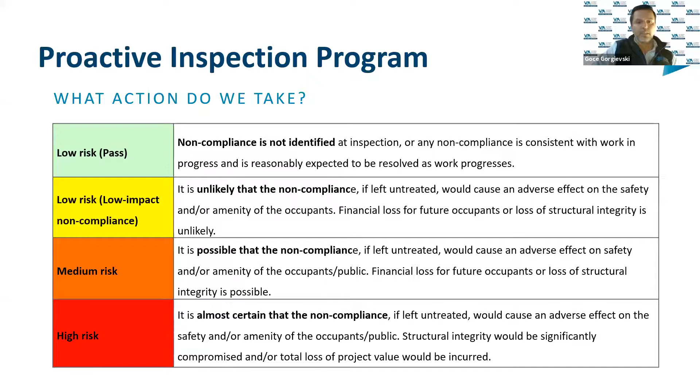Recent findings: a tad over 4,000 inspections were conducted in Q4, comprising 2,252 building and 1,796 plumbing inspections. They were conducted across 50 municipalities in Victoria, covering 722 builders and 174 building surveyors across the state.

28% of the overall inspections showed compliance risks. A total of 1,139 notifications have been sent out.

The most common non-compliance issues found on site were to do with timber framing, unreinforced brickwork and accessories, footing, slab constructions and subfloor, and damp and weatherproofing.

Framing was considered the highest, so for the purpose of this presentation we're going to focus on the timber framing defects. Other defect findings will be presented most likely at a later stage.

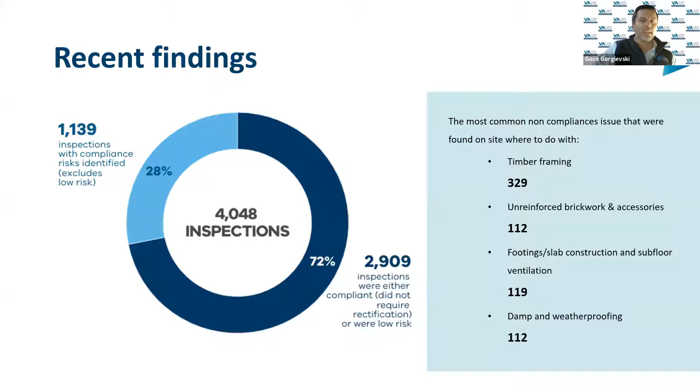So in today's session, we'll be highlighting the most common issues the inspectors identify on site that relate to timber framing. It will provide examples and explanations of defective building work we identify and how they have been rectified.

In most cases, when the team attends building sites, the mandatory frame inspections have been approved and the roof is already loaded. The majority of these items in the following slides have been identified after receiving confirmation from the relevant building surveyor that the frame inspections have already been conducted and approved.

It is possible that if it was left untreated, or were not detected throughout the proactive inspection program, it would have caused an adverse effect on the health and safety of the occupants and future financial loss to the owners.

Our aim today is to highlight various issues the team identifies on a weekly basis. Various before and after shots have been provided showing compliant and non-compliant construction.

We'll kick off with an easy one, but a very common one: bottom plates overhanging the concrete slab. The photographs highlighted in red show the bottom plate overhanging the slab. This is not compliant. Under the Australian standards, there are no prescribed allowances for that timber bottom plate to overhang. It is defective building work.

The guides to standards and tolerances, currently under review, allow a 90mm stud to overhang only a maximum of 10mm, but this is just a guide. Areas that exceed the allowable tolerance require a review from the relevant registered civil engineer to provide evidence that compliance with the NCC 2019 Volume 2, Part 2.1 is satisfied.

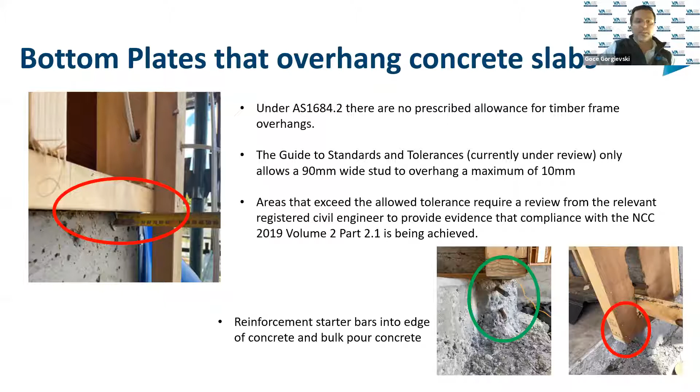Attached are some more examples regarding bottom plate overhang on the slab. The top left photo shows the bottom plate installed correctly. On the same job, a section of the bottom plate, when measured, was overhanging the slab by 30 mil. As there are no prescribed allowances for the timber bottom plate to overhang, this is non-compliant building work.

A common rectification detail on site normally involves a steel angle dyna bolted to the slab. As you can see in the photo below, highlighted in green, this builder has installed a treated pine H4 timber dyna bolted to the slab at 450 centres. This rectification was designed by a registered civil engineer that complied with Part 2.1 of Volume 2.

Also, when the bottom plates overhang the slab, please ensure the minimum cavity widths are not compromised when the brickwork commences.

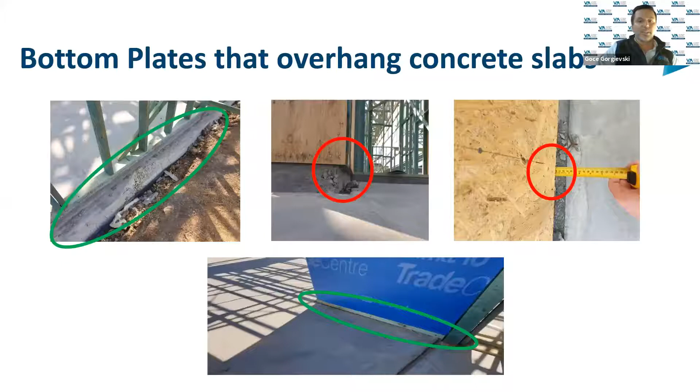These photographs show excessive notching and cutting to bottom plates and studs. This is deemed defective. The Australian Standards allow for a maximum hole of 25 mil on the face of the bottom plate. The structural integrity of the framework has been compromised in the photographs. Part 6.2.1.4 of the Australian Standards must be followed.

To add, where notching exceeds this in a braced wall, consideration must be given to Part 8.3.6, noting that sheet bracing walls require a continuous bottom plate. Studs were also not evenly spaced as required by the Australian Standards to suit loads, lining and cladding fixings. When they are cut and do not run the full height, this is no longer achieved and is deemed defective.

Braced walls: the first photo shows an existing timber braced wall, highlighted in red, that has been cut so a post can be installed. This is deemed non-compliant. The buildings are designed to resist imposing forces. Alterations and additions should factor in existing braced walls to ensure that they are not compromised as part of the new work. They should be reinstated, or another suitable wall nominated and braced.

In the second picture, highlighted green, the rectification was to install new steel bracing where the existing timber brace was cut. Compliance was restored.

In the third picture, the metal bracing does not span the full length of the wall. This is defective. Metal bracing is required to span from the top plate down to the bottom plate. Where the bracing is cut, as identified in the photo, to allow for plumbing work, the wall is no longer working towards providing the initial assumed bracing capacity. Once the plumbing work has been completed, the bracing should be reinstated as originally designed and constructed.

The team inspects a lot of braced walls. Bracing is normally not installed on a 30 to 60 degree angle, and as you can see in the last photo, the braced wall was measured at less than 1.8 in width. For compliance to be achieved, the braced wall width should be between 1.8 minimum and 2.7 maximum. These minimum and maximum requirements are straight out of the Australian Standards.

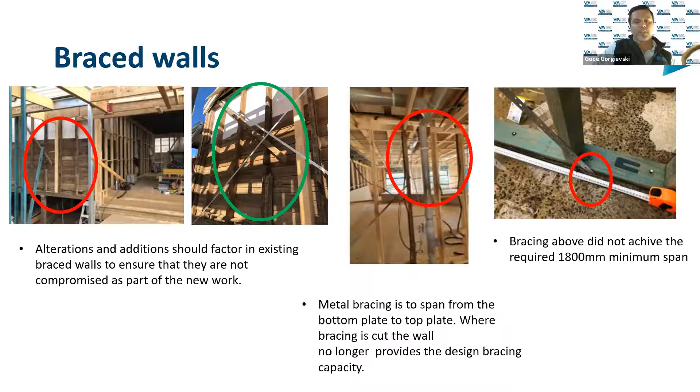In this next slide, it's more of a design oversight. When considering the location of braced walls, it is important to factor in the proposed service fittings that are going to be installed within that wall. Consideration was not taken into account for the services to be installed. The bracing has to be cut to complete the mechanical services and will compromise the initial bracing capacity.

The bracing has already been cut when the toilet fittings were being installed. This is defective building work. The wall is no longer working towards providing the initial assumed bracing capacity. The bracing should be reinstated. If it cannot be reinstated, another wall may be required to be braced, or alternative brace sheeting provided to achieve compliance. This obviously must be discussed with the relevant building surveyor or engineer.

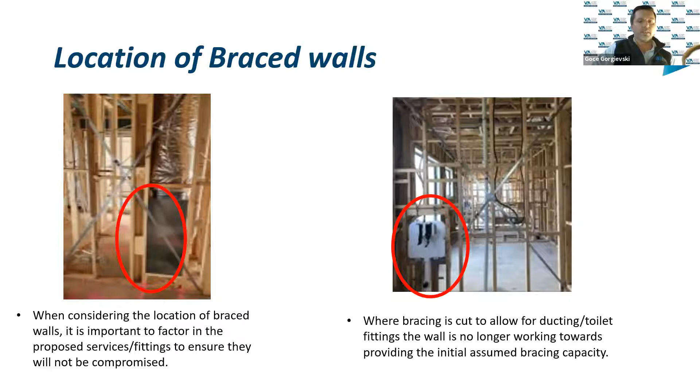Excessive notching of braced walls is pretty common. Ensure that the manufacturer's installation guides are being followed so that the wall can still provide the required bracing capacity. Depending on the sheet bracing being used, most commonly areas within 300 mil of the corners should be avoided. Small diameter service pipe penetrations of approximately 30 mil should only be drilled a maximum of 4 per sheet, and large service pipe penetrations of a maximum of 150 mil are limited to 1 per sheet.

Also, unless otherwise specified, the sheet bracing must span a minimum of 900 mil wide. In the top right photo, to achieve compliance, the bracing had to be replaced due to the excessive cuts. Australian Standard 1684 requires that the sheeting be continuous from the top plate to the bottom plate, with any horizontal sheet joints made over noggings with the same fixings as the top and bottom plate. Part 8.3.6 of the Australian Standards outlines the required installation for different bracing units.

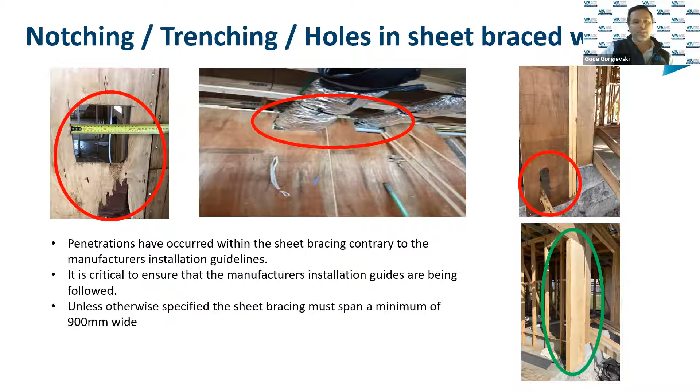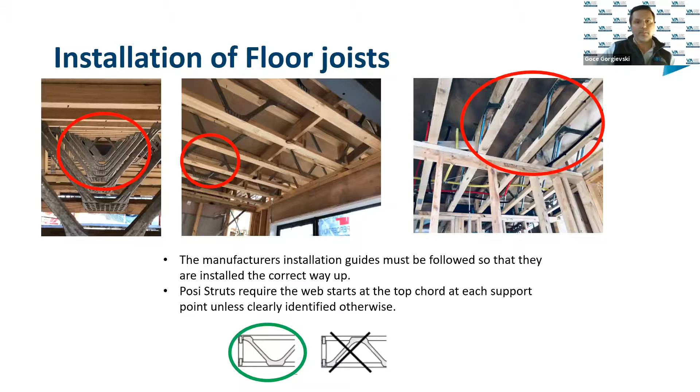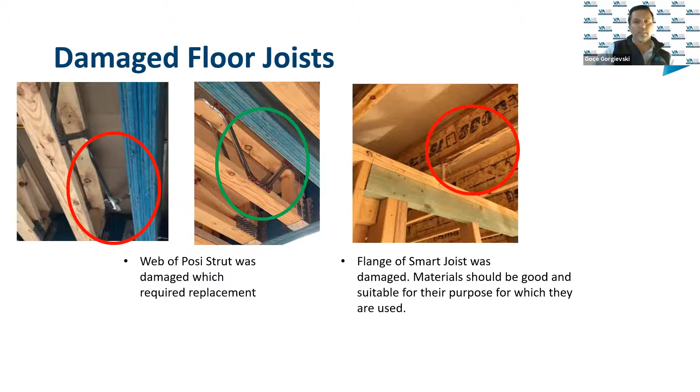As you will see in the next two slides, the plumbers have had a field day. These items are identified on a daily basis by the team. By highlighting these issues, we hope to make various trades, supervisors and builders aware that this practice and advice is defective and not acceptable. The structural integrity of the product has been affected.

We encourage inspectors, supervisors and builders to keep a lookout for this item, and if noticed, raise it and work with the engineer and the relevant building surveyor to rectify it. If left undetected, it could lead to serious structural collapse. It's critical that supervisors and builders are aware of this practice occurring, as 8 out of 10 times the frame inspection has already been approved prior to any services being installed.

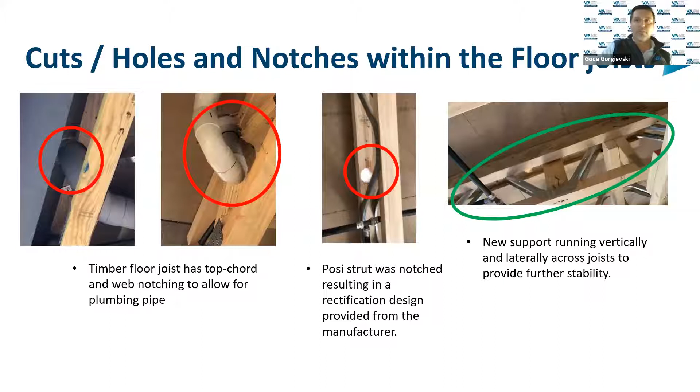With so many different products in the market, it may be confusing to keep up with the requirements. When using E-joists, the cuts must be neat and not within 5 mil of the flanges, as per the manufacturer's installation guidelines. The spacing of the holes is also important depending on the width and diameter of the holes. Please ensure that the correct manufacturer's installation manuals are followed for the product used on site.

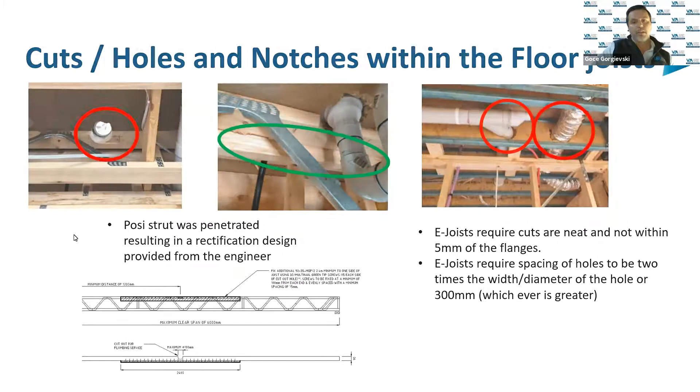The most common defect the team identifies on site relates to floor joists and the lack of end blocking and bracing. Not providing blocking or bracing is a defect. The blocking or bracing at the ends of the floor joists is critical as it provides lateral support to resist racking effects imposed on the structure. Depending on the product and method of bracing used, it can be between 1.2 to 2.4 metres max.

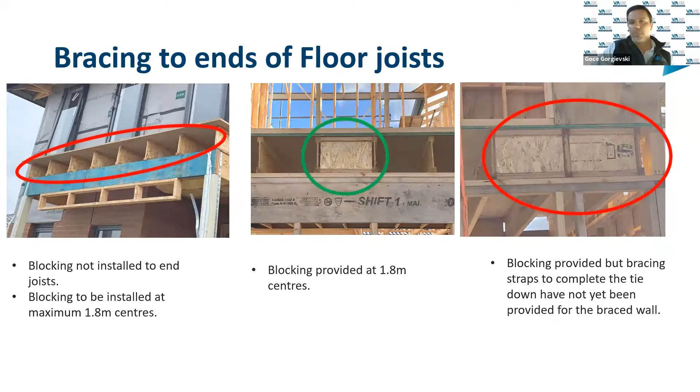The other less common bracing to the ends of the floor joists we see on site, but not as much these days, are speed bracing, plywood sheet bracing to the posis. They are required at 2.4 centres. Always install it in accordance with the manufacturer's installation guide. The manufacturer's guidelines are all easily accessible on the web and are also provided at the time of delivery of the product.

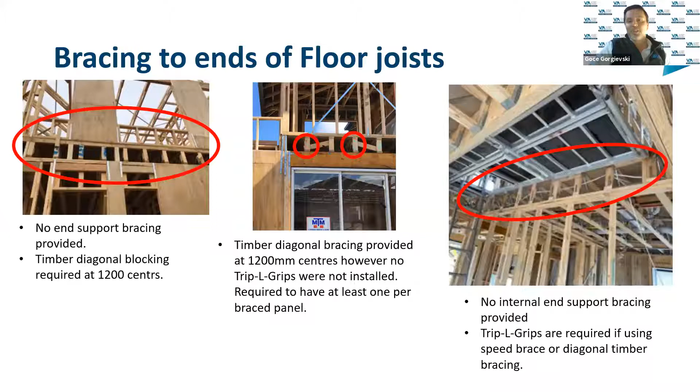For the building inspectors in the group, make sure you have the latest installation guides handy.

Why are strongbacks important? Well, they are required bracing elements as part of the design as a whole. They also provide load sharing and increase the floor's stiffness, which in turn reduces squeaky floors. The performance of the floors depends highly on the installation of the strongbacks. By cutting and removing the strongbacks, you affect the structural integrity of the overall design.

A fun fact: for optimal performance, ideally the strongbacks should be installed hard up against the top chords.

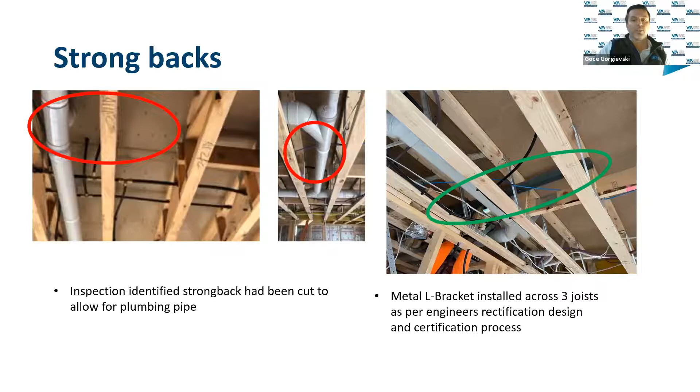Fixing of trusses to internal walls. The photo on the left shows that the slotted L brackets have not been installed at 1800 centres. This is deemed non-compliant. The Australian Standard 1684.2 requires internal non-load bearing walls to be provided with slotted brackets at 1.8 centres to allow for movement when the truss is loaded.

For an internal non-load bearing braced wall, the truss must be fixed to the top plate of the wall, which restrains the truss from horizontal forces but allows for movement upon loading of the truss, as specified in Australian Standard 4440. The photo on the right is deemed non-compliant.

Adequate fixings are to be provided to internal walls, especially for braced walls. If in doubt, please refer to Table 8.22 in the Australian Standards, which details various methods that can be adopted.

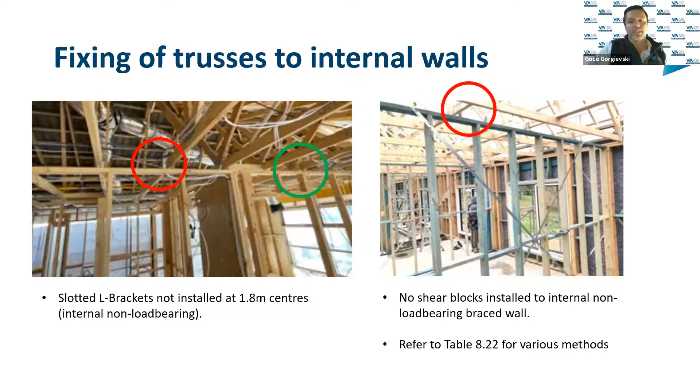Half trusses. In this slide, the ends of the half trusses have not been provided with bracing, highlighted in red. When bracing is not provided, it's deemed non-compliant building work.

Typical fixings seen on site may include steel bracing and timber diagonal blocking. On the bottom left-hand side photo, highlighted in green, diagonal timber bracing has been provided. This is compliant building work.

On the bottom right, speed bracing has been installed, once again highlighted in green. We have also highlighted the same photo in red. The steel brace is not bent and nailed to the side of the top chord, and to make matters worse, a timber block to the top chords fixed to the trusses has not been provided, therefore deemed defective.

Bracing is critical to ensure that imposed forces are transferred back to the supporting structure. The Australian Standards 4440 Part 4.3.A nominates the required fixing of the bracing to the end of the cut or half trusses. Always install it in accordance with the manufacturer's installation guide. They provide clear and very detailed methods.

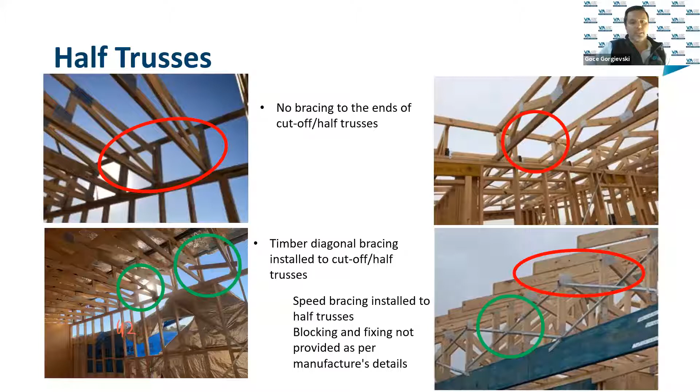Other structural issues: in these photographs, the concentrated loads were not transferred down from the first floor to the ground floor. This is defective. They went to all that effort to cut the blocks to fit in between the ground and first floor, but forgot to provide the double studs down to the slab. This is non-compliant, and a high-risk issue if left undetected.

Why are these critical? It is important to the structural stability of the construction that all load-bearing concentrated load points are transferred down through the structure and onto the footings.

In the middle example, blocking has not been provided between the ground floor and first floor. The ring beam is not sufficient on its own, deeming it non-compliant. In the last example, highlighted green, blocking was provided to transfer the loads from the first floor to the ground floor, and as you can see, double studs are also provided. This is compliant building work.

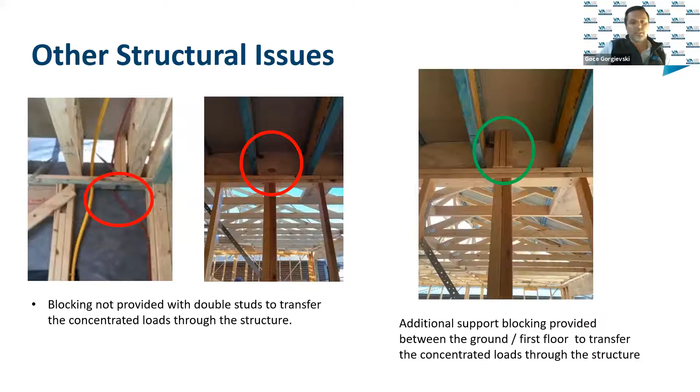I know some of you may find these items in this presentation alarming. This is what the team faces on a weekly basis. Thank you all for your time, and I hope you all got something out of these issues.